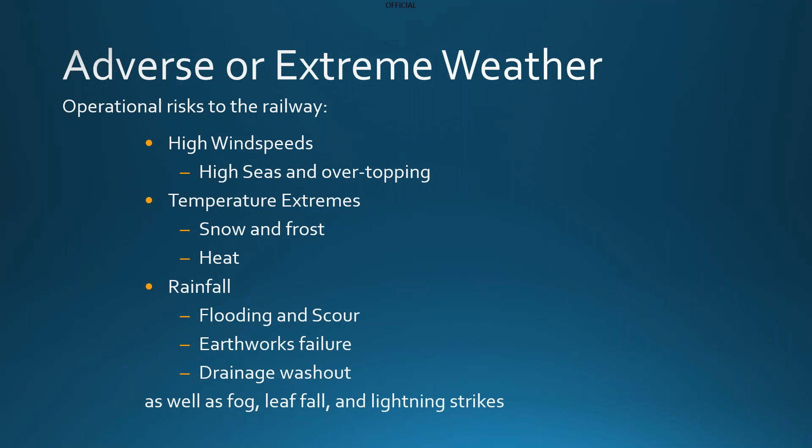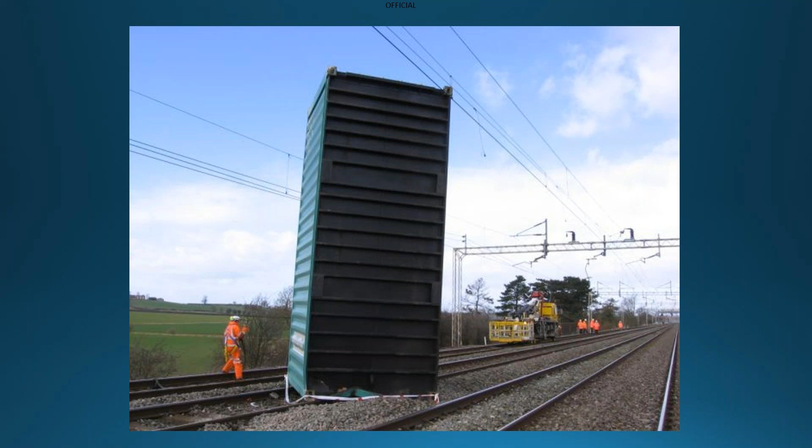This is a rather bizarre thing, which looks as though it should more likely be on the cover of a 1970s rock album or possibly a science fiction book. This is at Cheddington on the West Coast Main Line, when a couple of containers were literally blown off the top of a train as it travelled over a fairly high embankment, a most bizarre sight. Winter Wonderland, I think somewhere in Scotland.

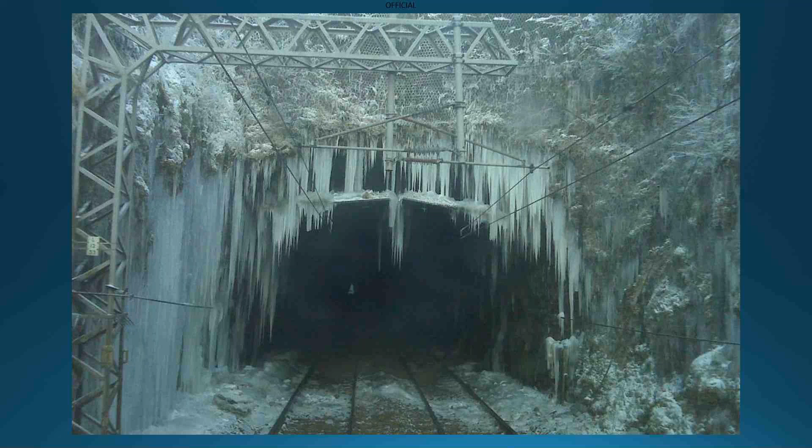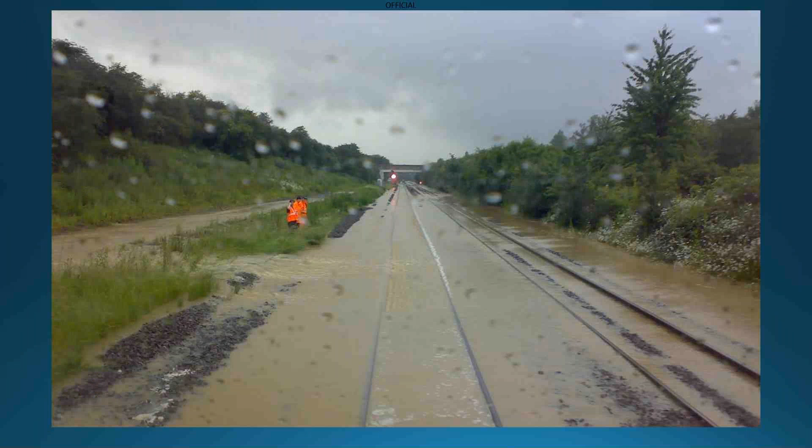Fenny Compton cutting on the DCL line was a source of frequent flooding. This is an old picture. The sharp-eyed among you will notice that the person on the left is not wearing full PPE. I hasten to add, it is an old picture, but it caused us lots of problems for a very long period of time.

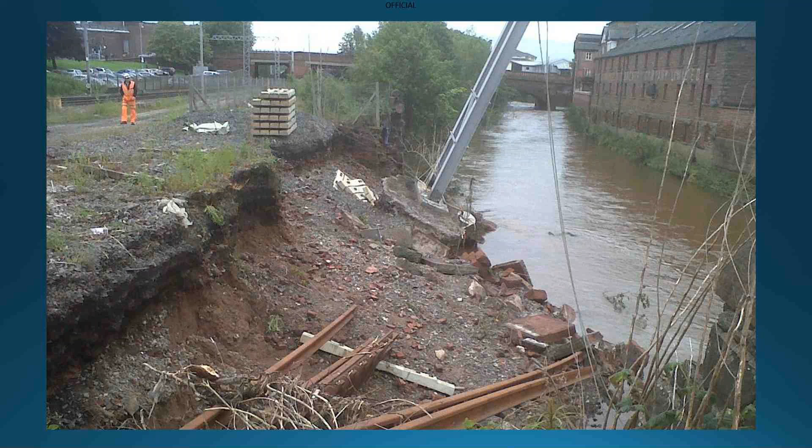This is the River Caldew in Carlisle. I believe this was at the time of Storm Desmond, December 2015, but it washed away the retaining structure along the River Caldew, which is flowing towards you in that picture, and caused no end of nuisance during Storm Desmond, including flooding the whole of the track on the approaches to the viaduct over the Eden, further to the north.

Interestingly, and as a bit of an aside, we repaired the boundary wall, which I think you can see just in the distance there. It's just a wall at the top of the retaining structure, and the EA got quite miffed with us because the gap in the wall that was there beforehand was actually a critical flow relief path for their flood model for Carlisle.

We just thought the wall had fallen down, but they'd actually built it into their model to minimise flood risk in Carlisle. And actually, when we restored the wall, it made the flooding worse in the town. So there you go. Just shows how little we know about the detail of these things.

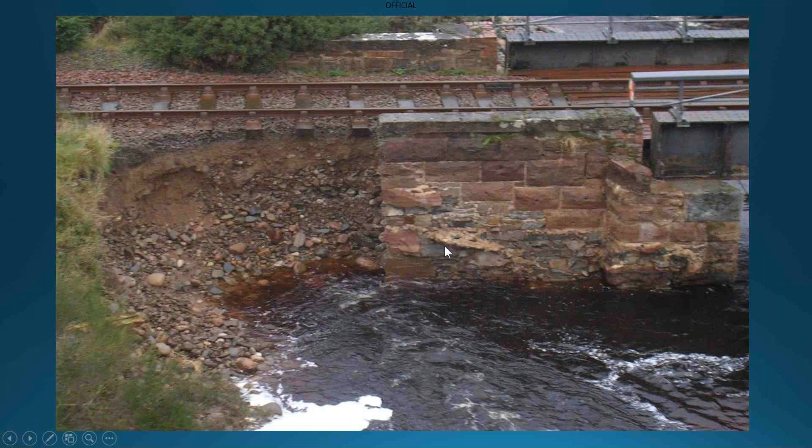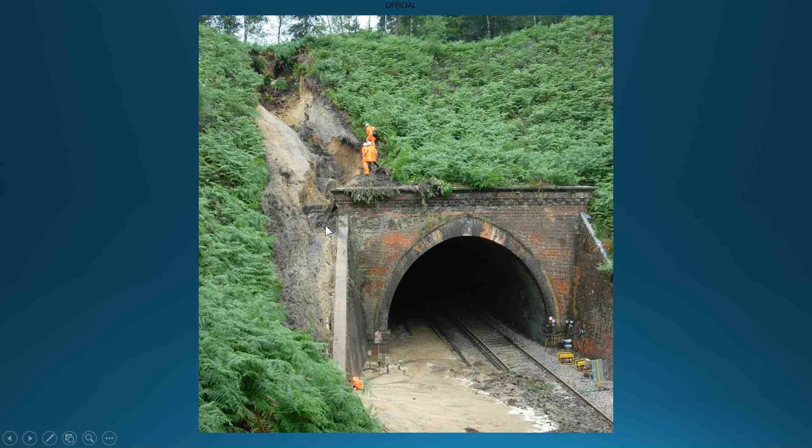This is a random structure in Scotland. There was fairly severe flooding on one of the Highland lines, and it removed part of the bridge abutment. And an unspecified tunnel portal in the southeast, showing fairly severe erosion of loose granular materials at a tunnel portal, which led to a flow of debris onto the track down below. Again, the keen-eyed will spot the third rail.

But I think it's really important to understand why water has such a bad impact on our assets. Those of you who are P-way engineers will understand the impact the water has on track formation, not just in flooding, but obviously formation issues and wet beds and so on. There is a big chunk of this talk, which I make no apology for, I'm a geotechnical engineer after all, which relates to the impacts that water have on earthwork assets.

So apologies if it's not focused on P-way, but I think from our point of view, drainage is a system and it serves all parts of the railway assets. And I think it's really important that we bear that in mind as we consider the impacts of weather.

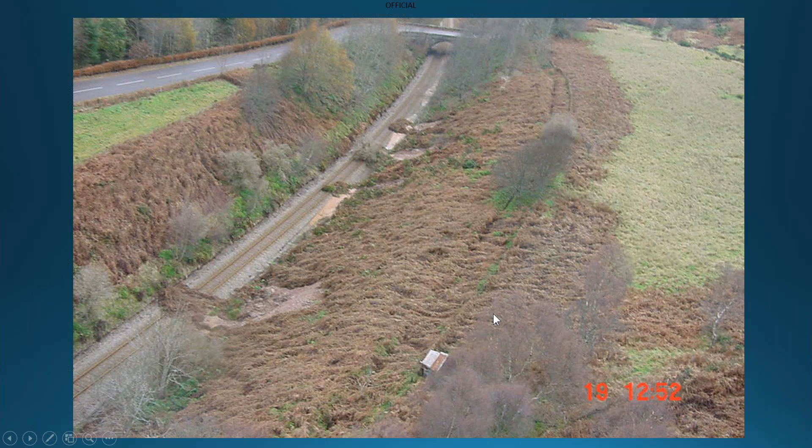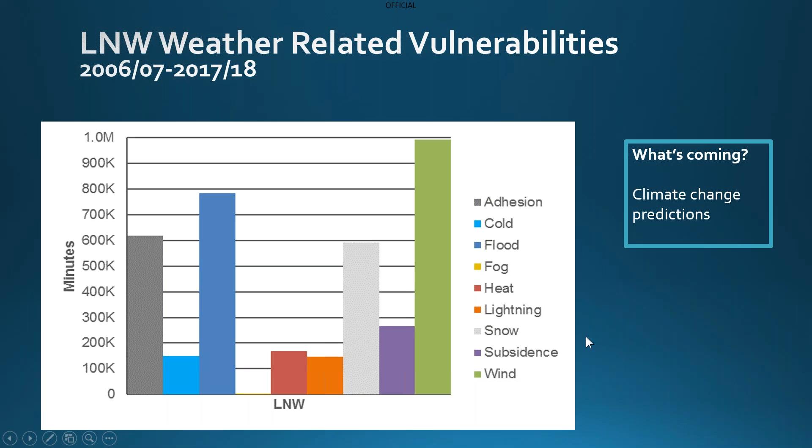So to move on, just a bit of an overview showing the impacts that water has. We have wind having the biggest single impact, but when you consider the combined effects of snow as well as flooding, and also the impacts of the lack of water due to heat and its impact on earthworks, more of that later, a substantial proportion of the weather-related delay minutes are due to the impacts of water in whatever form it arrives on the railway and on the network. So it is a very significant thing, and effective management is particularly important, obviously.

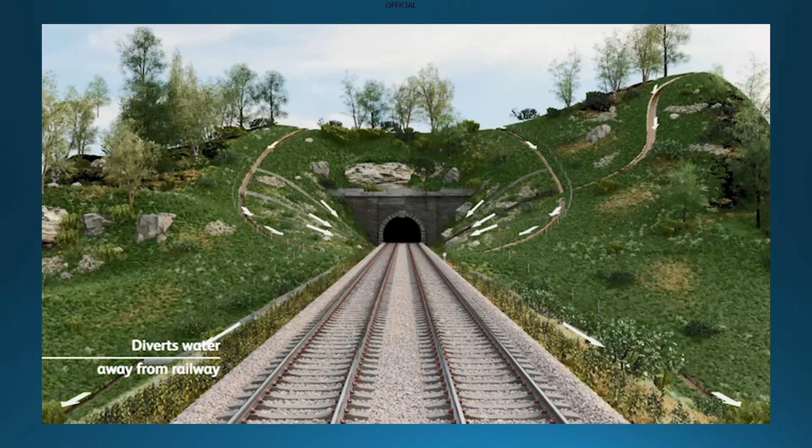So in this title I stressed the fact that this is an integrated system. And I think these two pictures that I've got here help to illustrate it. Both of these images are not images of the North Portal of Helm Tunnel on the Settle and Carlisle, although they do look a little bit like it. But they are actually taken from our Network Rail how-to guides. And these are a really good resource.

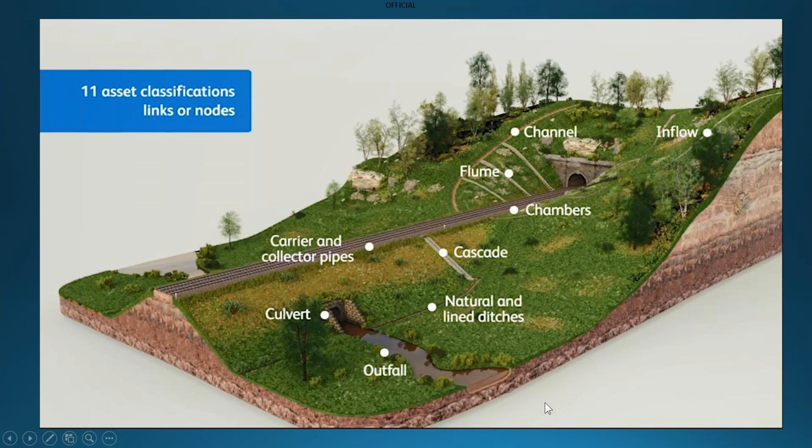And if anybody is on the call who works for Network Rail, well, in fact, you don't need to work for Network Rail because they're all available via YouTube. If you've not seen them, they are a really good primer and a really good introduction to drainage systems, drainage inspection, the Network Rail approach. They're tied into the latest version of the standards. Each video is around about 10 minutes, and it provides you with a useful guide to the sorts of assets that we're looking at.

But I just really want to stress in this picture the fact that this is a system, from the water coming in the inflows on the top right hand side, or the channel in the center right. We are managing water from third party land across our asset and to an outfall. A lot of that water is reliant on travelling through the track drainage system, but the track drainage system needs to have the capability of accepting water from off track and delivering water effectively and in a non-destructive way to an outfall at a sensible location.

And I really would like to stress the importance of the system approach. Structural engineers will be interested in the management of drainage across tunnel portals or in the formation where it crosses an underbridge. P-way engineers will be interested in the effective management of water off over bridges down onto the track, and so it goes on. So it's very hard to just consider the drainage for one part of the asset groups in isolation. And if there's one message you go away from this talk with, it's that drainage is a system, and we need to manage it as a system, and that is a really important message to get across to everybody in the business.

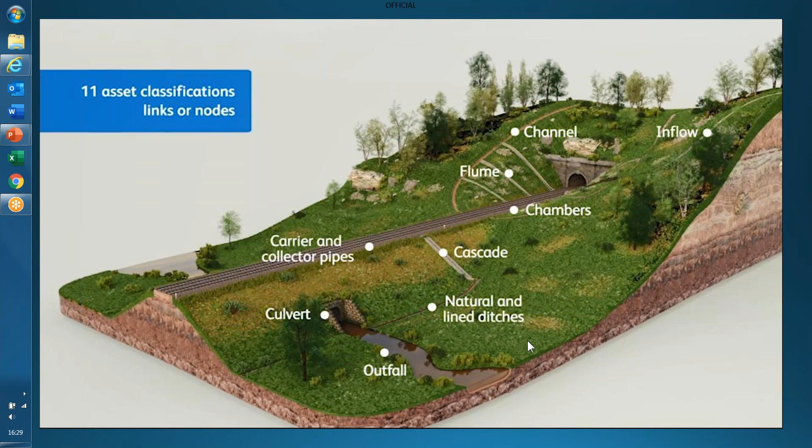Just a bit of detail on how water affects earthworks, really, and I will rattle through these slides fairly quickly because it's a sort of hydrology and soil mechanics, but hopefully of interest.

All of these water tables have an impact on the stability of the earthwork and the way that the earthwork and indeed the underlying soils behave. And it's really, really important that we manage this water, the water in the ground, as effectively as we manage the water on the surface as well.

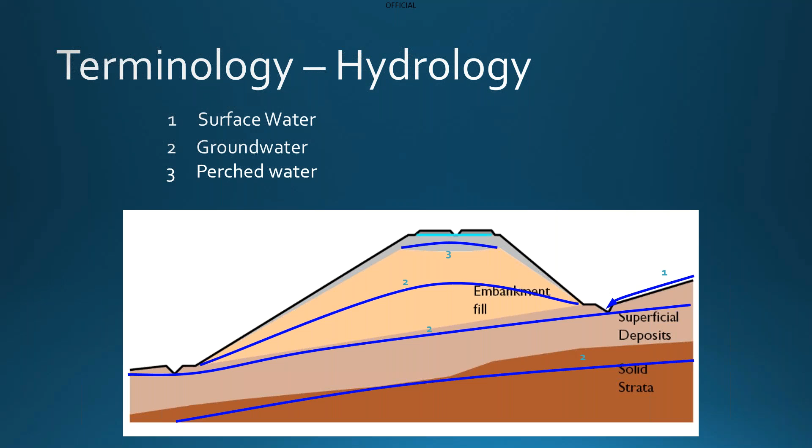A little note on effective stress, because effective stress is a crucial concept. What the concept tells us is that if you submerge a lump of rock underwater and you're holding it in your hand, it feels as though it weighs less. That's because, like anything, it is being buoyed up by the water around it. The impact of this is that if you have a soil that is completely saturated, the particles inside it are buoyed up to a degree by the water around them, and therefore the forces acting, those little arrows, point-to-point contacts, apply less friction between the grains.

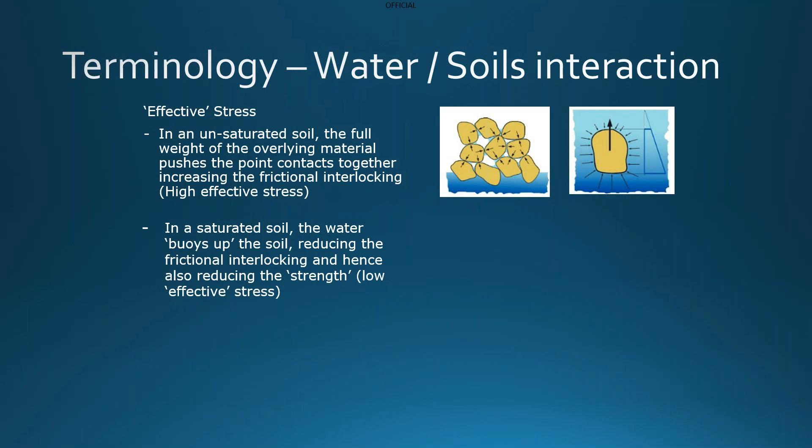So this concept of effective stress is really important because it's partly the friction, I'll come on to this in the next couple of slides, but in a granular soil, it is the frictional forces that hold the earthwork up. And if you reduce the strength of those frictional forces, you reduce the shear strength and you reduce the ability of the earthwork to stand up. So it's really important that water levels are managed if you want your earthworks to behave themselves.

Let's just continue on. Cohesion, on the other hand, is a factor also, and this is the sort of surface tension effect, which is the electrostatic attraction of the water to the soil particle. It's not very significant in large grained soil, so sands and gravels. You'll notice when you're on a beach, if you're building a sandcastle, if the soil's damp, it stands vertical. That's the cohesion holding those sand grains together. But as it dries out, and as you lose that cohesion or surface tension effect, the sand all starts to fall down.

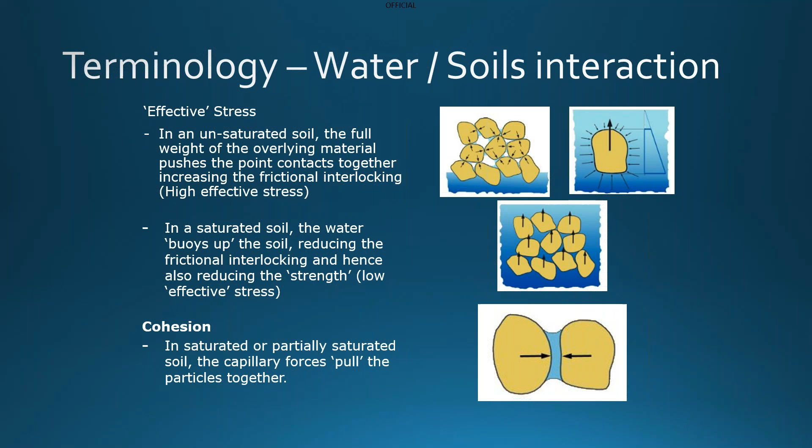So it's not very significant in sand, but if you reduce the grain sizes, looking at the bottom picture there, to clays, it starts to become hugely significant because the surface area of a clay is massively greater. If you took all of the particles in the clay, the surface area is massively greater in a clay than it is in a gravel or a sand. And so if you have those electrostatic forces, the surface tension forces acting on the grains of that massive surface area, it is sufficient to hold the clay upright.

And you'll see in some construction circumstances, boulder clay faces will stand vertical for a year and a half, 2 years of construction, simply held in place by the cohesive forces provided by the electrostatic attraction and the surface tension forces of the water in those clays. You wouldn't find a sand face standing up in the same way, because as it dried out, it would start to fall down. So water in soils affects them in a different way.

Silts are a story all of their own. I probably won't get bogged down in that, but they have some very peculiar properties which can cause problems. Perhaps some of the longer serving P-way engineers or those used to civils construction will be familiar with the term cow belly in excavations, where effectively you feel your feet wobbling on the formation you're standing on. It's a bit similar to the effect you get on beaches, where you start to get the effect of quicksand. And that can have significant impact on any excavations because it causes a lot of instability in them. But let's not dwell on that too much.

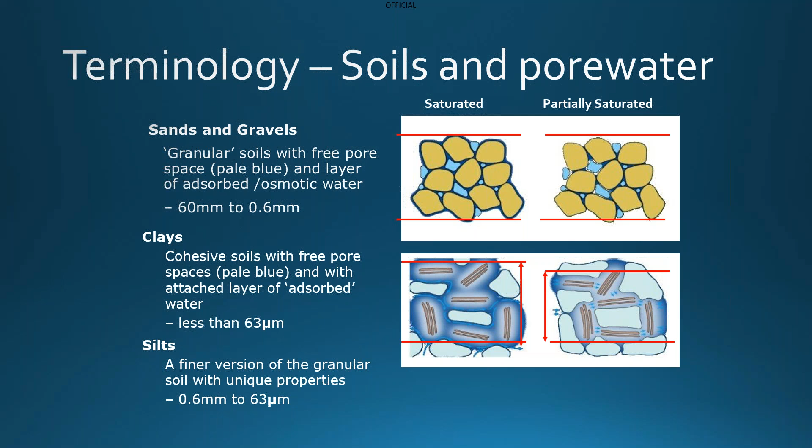So these slides will reappear throughout the course of the remainder of the presentation, but I don't want to dwell on it too much, as I say, because I am conscious that time will run away with me.

Water, therefore, is inherent in having impacts on formation failure. We understand the issues and impacts of formation where you'll have cyclic loading, you'll have movements at the interfaces between ballast and formation, you'll have disturbance and loosening, reduction in shear strength, introduction of water, and a gradual and progressive deterioration in the quality of that interface, unless the water is properly managed away from it.

It can be particularly bad if water is not managed in cohesive soils and silts, because the water cannot dissipate from the actual soil in the formation itself as easily as it can in a sand or a gravel. So sands and gravels generally are very good formation materials, but clays and silts we have to treat with a great deal of respect and make sure the water is carried away from the actual track bed construction itself, and that pathway is maintained, that gradient is maintained to the drain, either in the six foot or the cess, to ensure the water is carried away.

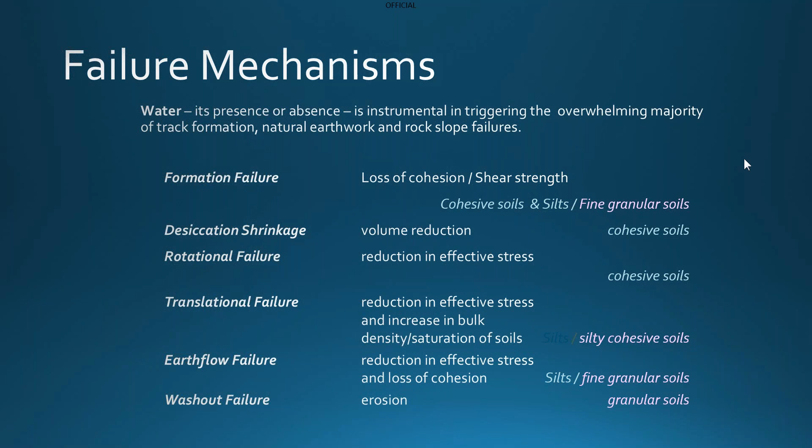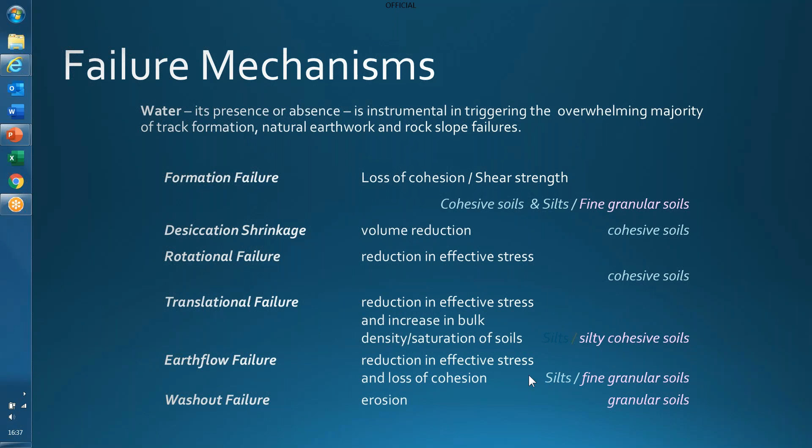Desiccation shrinkage I've mentioned leads to volume reduction. That's prevalent in clay soils. Rotational failure primarily happens in cohesive soils, due to a reduction in effective stress, and I'll show some diagrams in a moment which illustrate this. Translational failures again can be silty cohesive or granular soils. Earth flow failures, typically silts and fine granular soils which flow when they get too wet. And washout failure is just straightforward, good old-fashioned erosion due to too much water.

So just to illustrate those and what can go wrong, and I will whistle through these, a fine bit of formation treatment. Those of you who work on North West and Central route may well recognise this location, but it will be a sight to send chills through the hearts of all decent P-way engineers and geotechnical engineers for that matter. But simply cyclic loading of poorly drained formation leading to a complete remoulding and a complete reworking of the soils in the formation at this location. Not helped obviously by the fact there's a fast flowing stream on the left hand side and a permeable bank made of ballast which allows water to freely migrate across into the track.

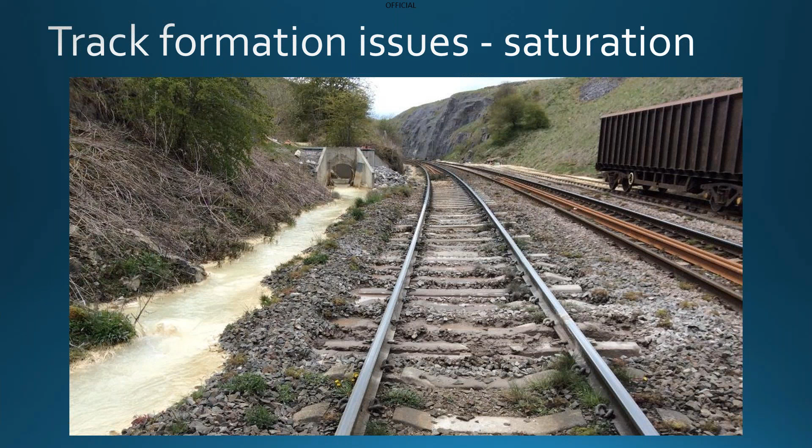Desiccation shrinkage I talked about. Here we've got a loss of top and also a loss of track alignment. The track has moved across towards the trees on the right hand side, which are ash. They have removed moisture locally, and you'll see that the loss of track alignment is very local to the position of some very tall ash trees.

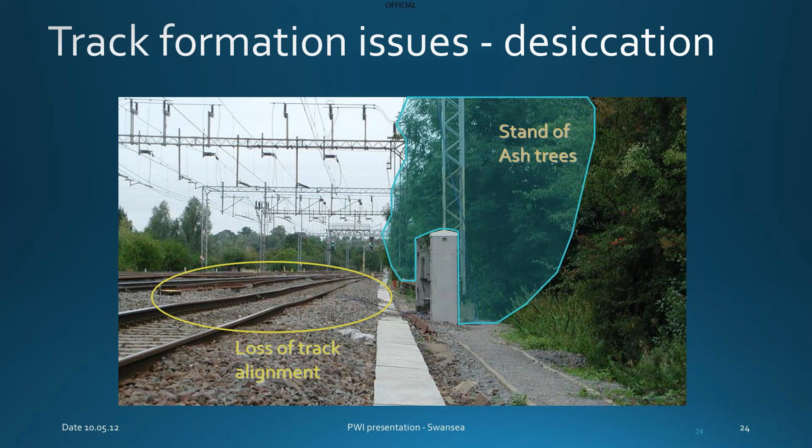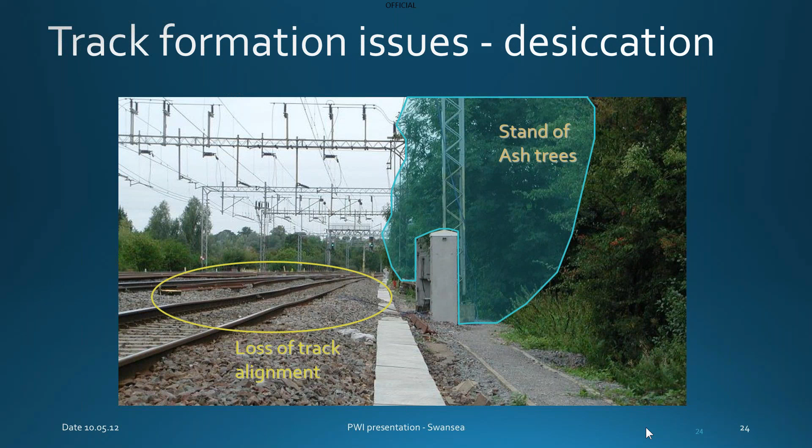Obviously, with the threat of ash dieback, it may not be a problem for much longer, but the prospect of a whole load of trees dying adjacent to the railway should fill us all with dread, because of course pretty soon we're in a position where they want to fall on the track. So let's not wish for the removal of ash trees too quickly. Again, I've talked about the desiccation.

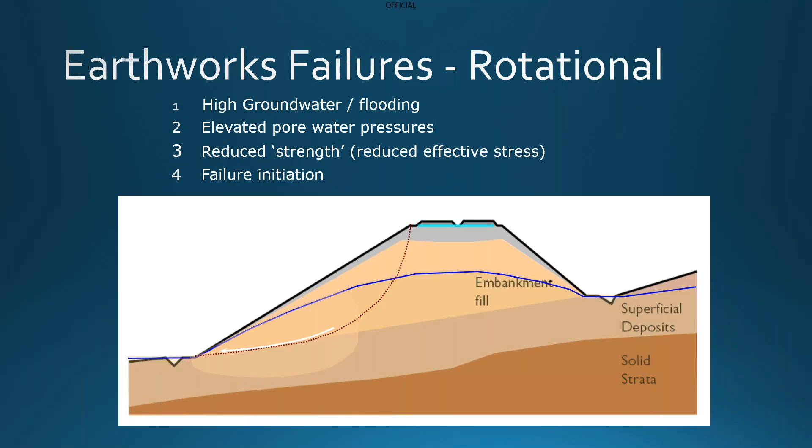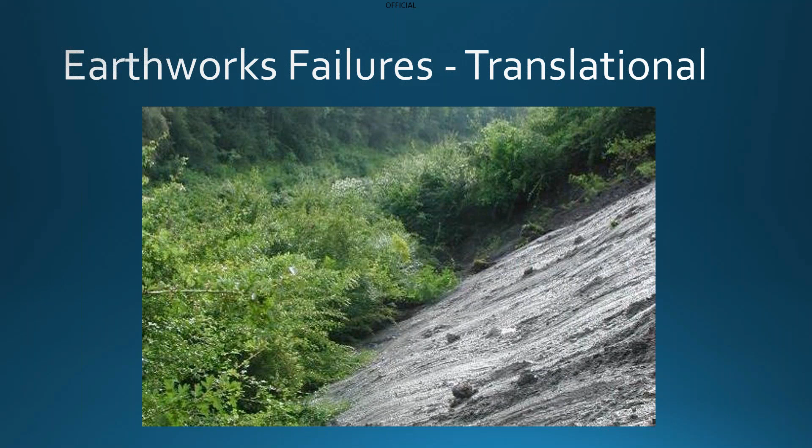This failure type is quite particular to soils where shallow weathering occurs into what we call mudrocks, so mudstones and marls. Marls very common across the Cheshire area, for example. The soil deteriorates to a depth of about a metre, metre and a half in that sort of light grey layer.

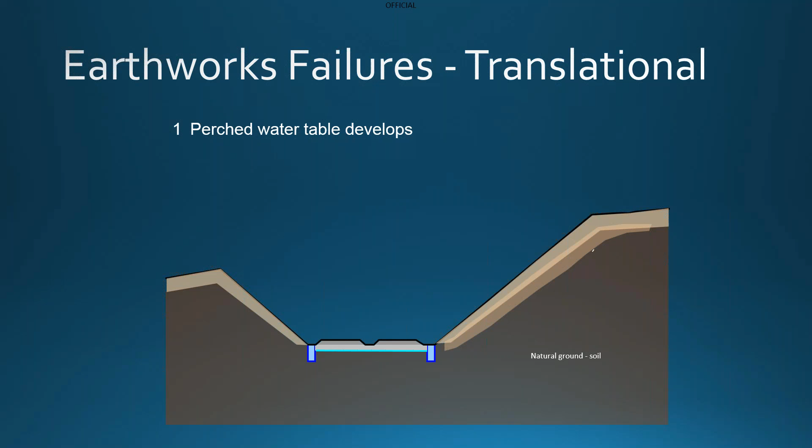And then what happens is that in torrential rainfall, water gets in through desiccation cracking and fractures in that surface layer, and it sits on the interface between the intact natural ground, the mudstone underneath, and the weathered layer on top. The pore water pressures build up. Typically they would build up down at the toe here, and that weathered layer becomes weakened. There's reduced strength on the interface, and the whole lot slides down into the cutting and onto the railway below.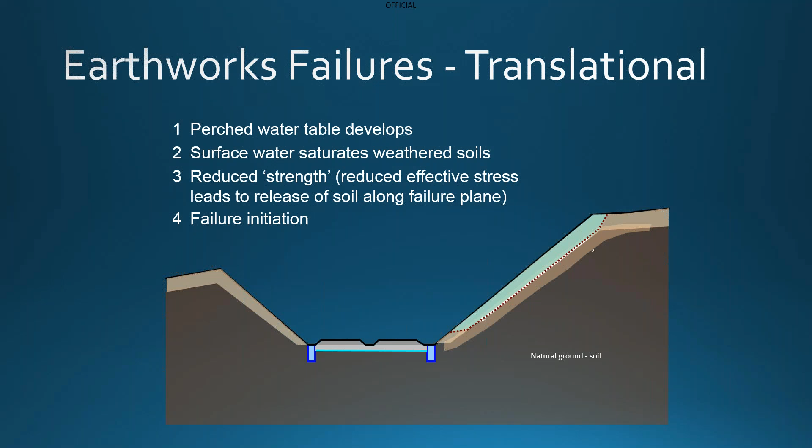So this is a failure typical of natural cutting slopes, and obviously can have a potentially serious impact on the safety of trains at the bottom. Again, principle of effective stress applies. This is an earthworks failure which occurred at Oubeck on the West Coast Main Line in 2005, and this is a classic earth flow failure.

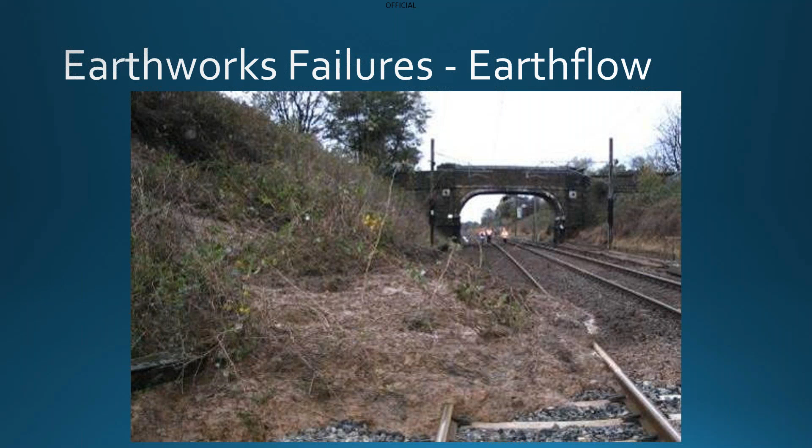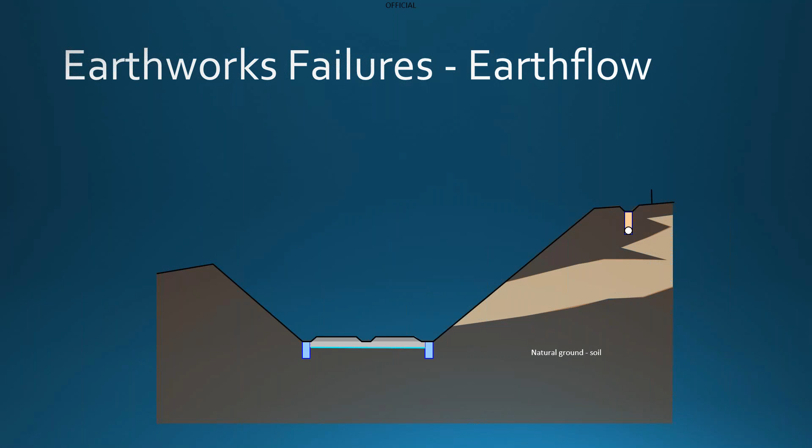In earth flow failures, there's a permeable layer; this light grey area here is a sand layer, and the dark grey layers are layers of clay. Water falling on the field above gets into the sand layer, and the water pressure builds. So the sand layer becomes saturated, the water table becomes elevated. At this toe location here, the water pressure exceeds the weight of the soil pressing down. As soon as that happens, there is nothing stopping that soil from moving. So it just becomes liquefied and it pours down onto the track. And that's exactly what happened at Oubeck.

Again, keen followers of earthworks failures, such as myself, will remember the site at Nethertown on the Cumbrian coastline. That was a very similar failure. A very serious rainfall event led to a failure of just this kind in a fluvio-glacial sand layer.

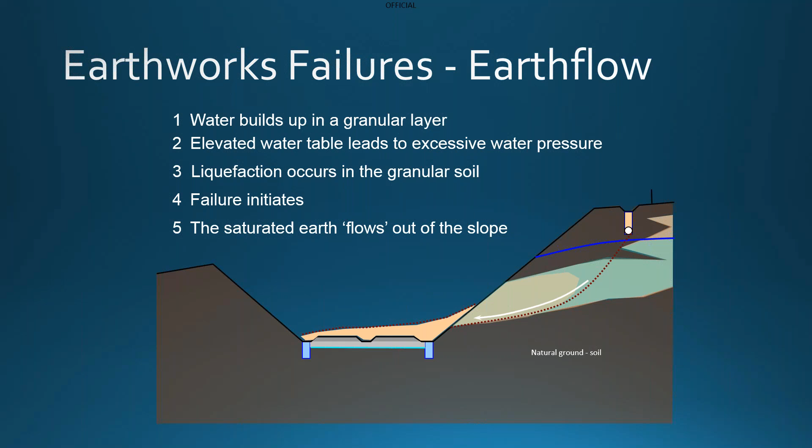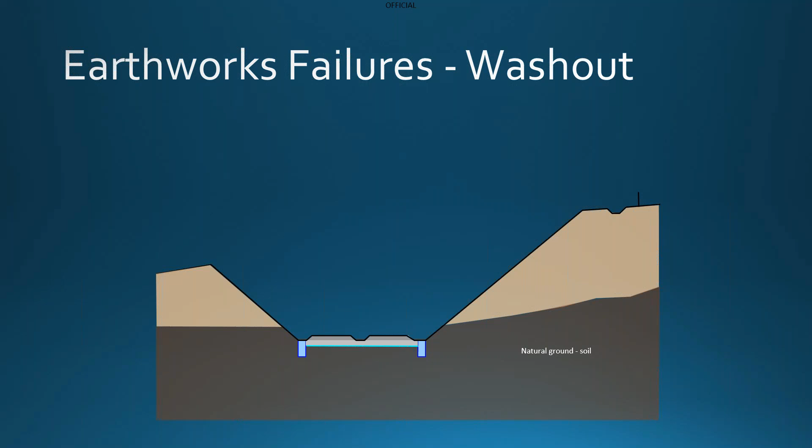Washout failures, as I mentioned, are really just too much water reaching the railway, flowing over the top, eroding soils, and so the light grey or light brown soils at the top here are erodible. Surface water flows down, it washes away, and it just literally carries it down onto the track, and the debris accumulates across the track.

Just reflecting on the behaviour of these materials, quite often you'll go to a site like this, see a big pile of debris, and you can actually walk over it because the water has escaped. The water has done its damage, and has now flowed out, drained away into the drainage, and actually what you have is a pile of sand across the track. So interesting behaviours in soils of this kind.

And in understanding the behaviour of these things, it's really important that we get a good grasp on the geology and the topography in the area. And this is what the geotechnical teams do. The earthworks examination process tries to pick up on all of these factors to assign a hazard score to the earthworks, and then align those hazard scores with the consequence of failure at a particular location. Clearly high consequence on a line like the West Coast Main Line, rather than on a minor freight route which may carry one train a day.

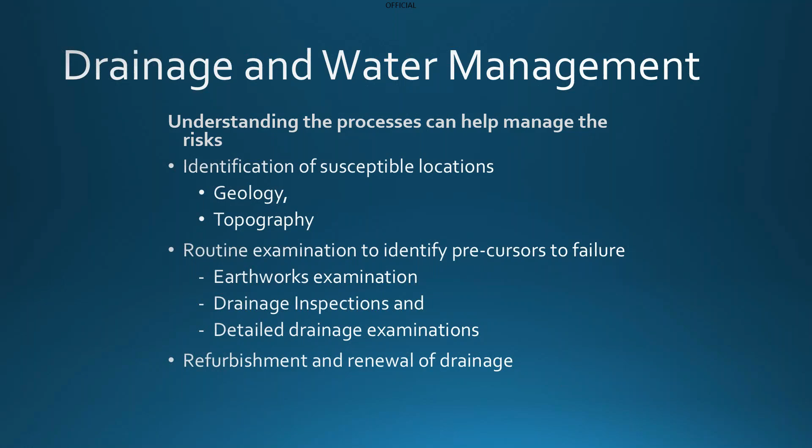And in that way, we are able to risk rank earthworks and to a degree also risk rank the associated drainage. But our drainage knowledge is nowhere near as good as our knowledge of earthworks. So that's a primer in the behaviour of earthworks and soils, and hopefully emphasises the importance of drainage in managing the risks to not only the earthworks but also to track formation.

Just want to say a few things about climate change, and I'll have to whiz through these slides because I'm conscious time is running away. Whatever our views of climate change impact, we should all be aware that there appears to be a greater increase in extremes in the weather we're experiencing. If you averaged out weather conditions over 5 years, you might find one 5-year period was pretty much the same as another. But what we are seeing is consistent with the predictions for climate change: an increase in storminess and in extremes in our weather conditions.

I helped pull together the draft Weather Resilience and Climate Change Adaptation Plan for North West and Central Region. I really just gathered the technical information from the engineering teams and put some words around it. All the clever stuff was done by the climate change team at Centre. The predictions here are UKCP09 data; we have UKCP18 data, the 2018 climate change prediction, which is broadly similar.

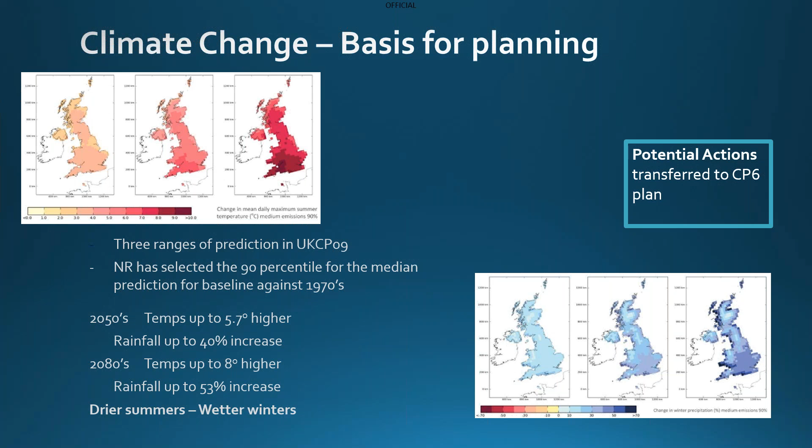For drainage and off-track, we have a lot of undercapacity drainage. Well, to be brutal, we don't actually know where any of our drainage is, and that's the first priority. But what we're aiming to do is improve resilience to extreme events during the course of the works that we do in CP6. Structures, again, greater focus on scour risk, improved coastal protection, and greater work on ice risk in tunnels for those fewer but more extreme ice events.

For track, of course, big impact on stressing temperatures, making sure that our seasonal preparedness is done correctly, and obviously with increased storminess and greater flood risk, a greater likelihood of wet beds and formation problems where our drainage is not functioning effectively.

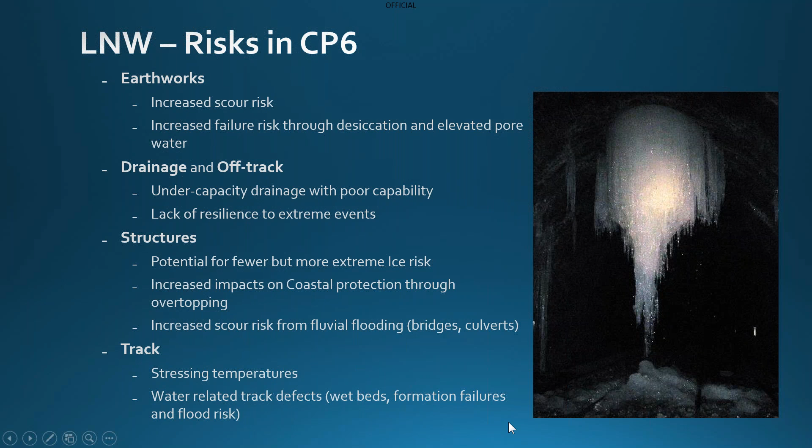So all of those things have been allowed for as part of business as usual within our plans for CP6, but we are also planning increased spend in a number of areas on earthworks, looking at soft rocks, for example, those ones which led to the failure at Harbury Cutting, subsidence and the impacts as a consequence of more water dissolving things like gypsum or causing collapse in voids underneath the ground, and addressing the backlog of track drainage and improving our approaches to vegetation management and that kind of thing.

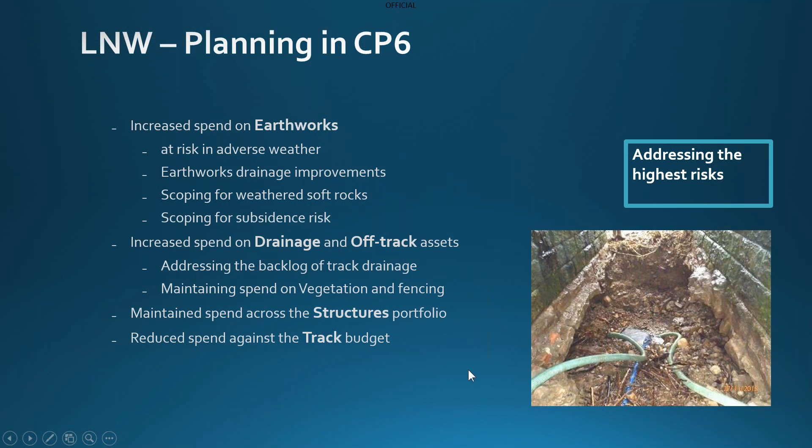On less trafficked routes, we'd be trying to manage the impacts of storms you'd expect perhaps once in every 25 years, so slightly less extreme than the 1 in 50. But we also have to make allowance for climate change impacts by considering the impacts of 1 in 200-year events, and making sure that the systems are resilient to resist extreme events of that kind, even if the track flooded, for example.

So these things are allowed for in the standards, and when we are delivering designs such as the one shown bottom right-hand corner there, we are taking into account these and trying to build the level of capability and capacity into the drainage as we're doing it. So that's our first measure in what we build.

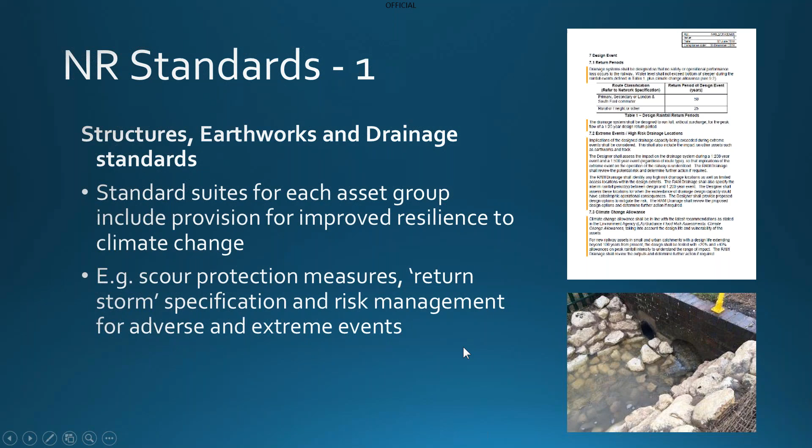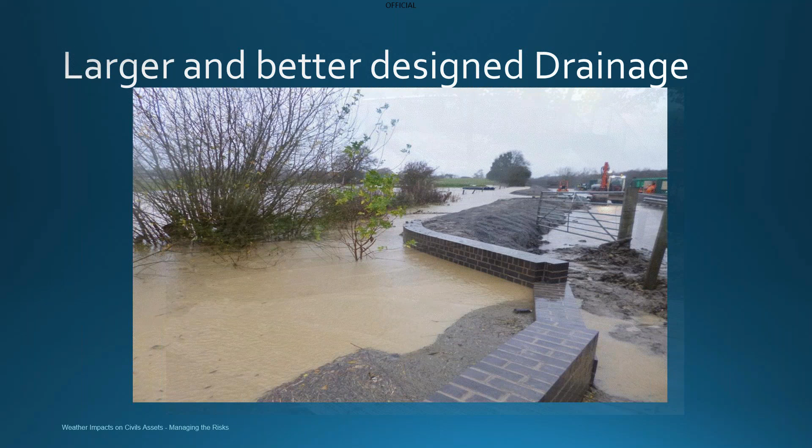And the sorts of drainage I'm showing here, if you remember that flooding picture with the person standing by the side of the railway not wearing full PPE, Fenny Compton cutting, this is the main feeder at the crest, and we've built an attenuation system there to hold the water back at times of extreme flooding to prevent the sort of flooding that we saw. You know, similar locations, we're trying to build adequate capacity into drainage systems, either formalizing drainage and making it more resilient, or putting in drainage where there was none before to try to manage the impacts.

It's not always possible to design to the standards, and that's something that needs to be directly mentioned in relation to the title of this talk, because it's all very well trying to design and manage for adverse weather, but you can't always afford to do it.

It's not always possible to build that 500mm diameter pipe in the six foot where the six foot is tight to gauge. And so we have to take a view on that, because we may find that trying to install a larger diameter pipe, one which is capable of managing a 1 in 50-year return storm in the six foot, is just not possible, and it doubles the cost of the job, and anyway the access isn't available.

So there's a heavy dose of pragmatism involved, and we need to look for alternative solutions such as building attenuation schemes off-site. That brings its own problems, because landowners don't like selling their land, or if they do want to sell them, they want to sell them for a very substantial profit.

And we have no rights of access, or very limited rights of access, to get in and insist on being able to do works. We're not like the power supply companies who have rights of access for maintenance. We don't have those. We have to negotiate every single access with adjacent landowners, and I think that's sometimes not appreciated by the general public.

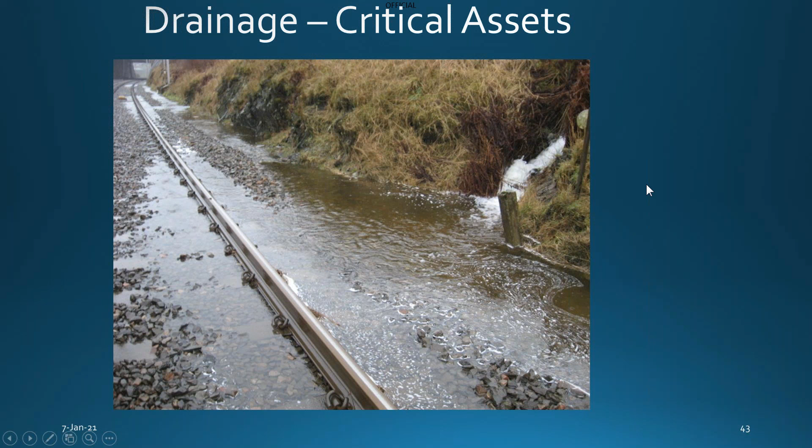Where we do have issues, and we have identified critical assets which flood on a regular basis, we're trying to introduce systems which have necessarily a level of resilience to reduce flood risk. And this is part of our business as usual, with a nod towards compliance to the standards to ensure that these locations are resilient. So that's in design, and there will be elements of that included, I'm sure, in the track design standards, which I'm not so familiar with.

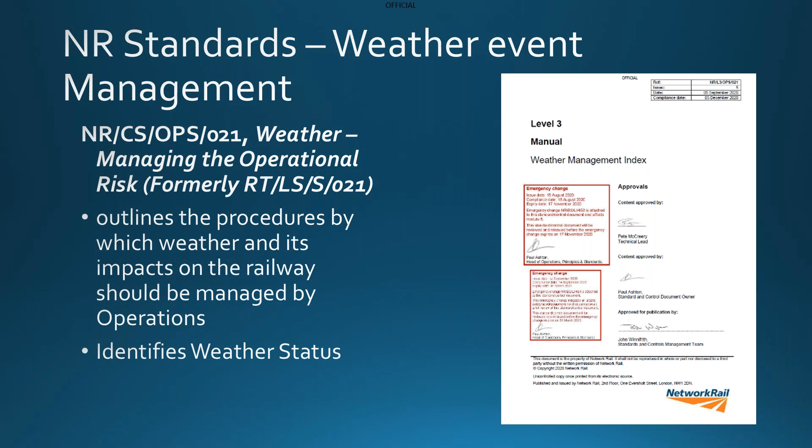When it comes to management of the risks associated with actual weather events, we have this weighty tome, standard 021, which really covers all of the things that we need to have as a region to manage weather effectively. It includes requirements for seasonal preparedness plans, and covers things like leaf fall and preparation for snow, making sure we've got the right processes and systems in place, and compliance with it is a major undertaking, which is why we have seasonal delivery specialists.

What we also have is TRK 1010, which is more targeted at how we respond to extreme weather events, and how we put people out on track and at key locations, how we manage the inspection regime at times of extreme weather, and how it ties in also with the plans for other asset groups, so the geotechnical team and the structures team.

And when I was leading the geotechnical team, we developed a plan for mitigation of risk associated with earthworks in adverse weather, and that involved us feeding into the 021 process and preparing a plan which enables us to anticipate where earthworks are at risk and where problems may occur, so that when an extreme weather action teleconference is called, we are able to provide clear guidance on those locations which we think are at risk, given the intensity of the storm.

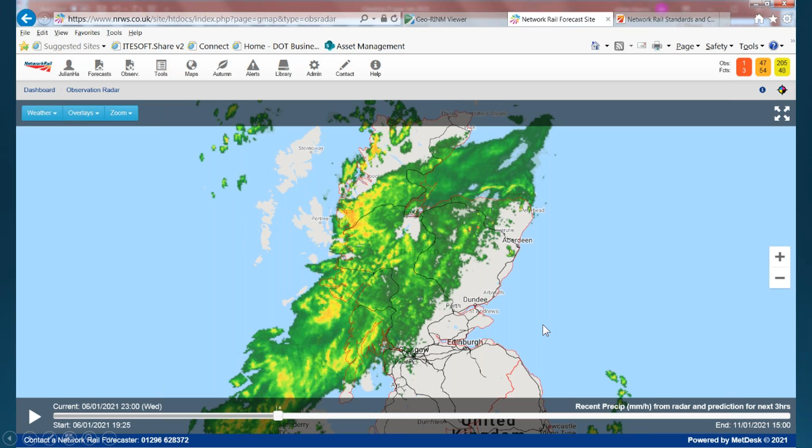And this is an extract from the observation radar. You'll see it was downloaded real time yesterday. But it does also include a prediction of what's going to happen to this band of rain, which was advancing over Scotland at the time. And that's extremely useful because it gives us the opportunity to look at predictions of rainfall based on the forecasts available at the time. And this will always be switched on as soon as an EWAT is called, so we can see what the predictions are.

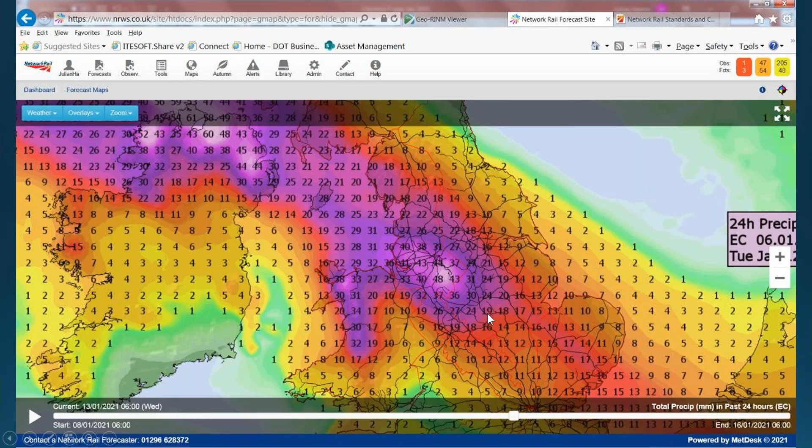This, you may want to be aware, is the weather forecast. I think it's for Tuesday next week, which shows around about 48 mil of rainfall falling on the Pennines adjacent or just south of Manchester, so Peak District Pennines border, which, let me tell you, is a substantial amount of rainfall. So I wouldn't be at all surprised if we have an EWAT called for this to manage the impacts. And what the tool allows us to do is take a forecast such as this and then look at whether we've breached critical thresholds.

And these critical thresholds for rainfall in the middle here, and just zoom into that, show us that adverse level is defined as being up to 20 to 25 mil of rainfall in a 12-hour period. Extreme rainfall is set as being 25 mil or more. Now these are levels that have been set centrally by the National Operating Centre, and they vary across the region.

You know, we say this quite frequently, but actually 15 to 19 mil of rainfall in Cumbria is just a normal balmy day in Cumbria, whereas 15 to 20 mil of rainfall down in the plush lowlands of Oxfordshire or Berkshire is a serious amount of rain.

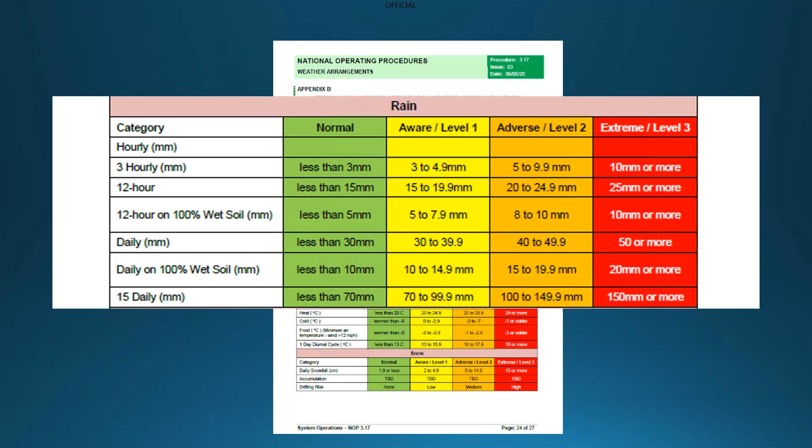So we need to manage this kind of rainfall and have techniques and processes of our own, and we need to interpret this data with a sensible and rational head and with appropriately qualified and experienced people.

Just moving on. So those are the systems and processes we have in place. That is business as usual, if you like, and we've developed those. There have been key events and critical incidents which have developed and built our capability in those areas. And I just want to talk about those for a moment because, of course, at the back of everybody's mind will be the incident at Stonehaven and Carmont in the summer, a really tragic event which I'm sure will have had the same effect on all of you on this conference call that it had on me, which is a sick feeling in the pit of my stomach.

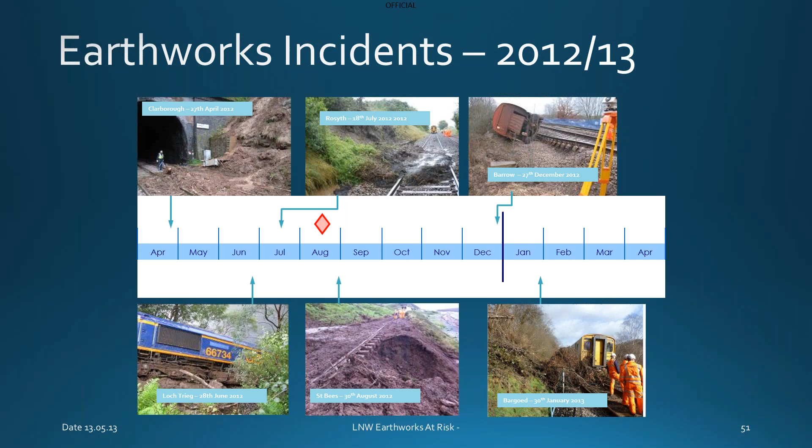We had a whole range of incidents in 2012-13, which were very prominent derailments. This led to a lot of scrutiny from the regulator and the establishment of a 10-point plan to start to address the issue of the impacts of adverse weather and excess water on the earthwork assets, because there were a very large number of derailments in a short space of time. We got an improvement notice because we were not felt to be moving quickly enough after that period of 12-13, and the 10-point plan was not being put in place quickly enough.

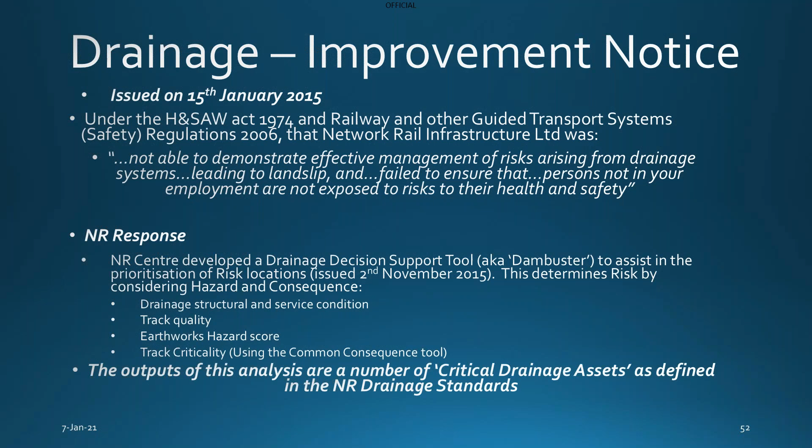So we were told that we were not able to demonstrate effective management of risks arising from drainage systems leading to landslip, and we were failing to ensure that persons not in our employment were not exposed to risk for health and safety. This led to the production of a list of critical drainage assets, and we have been managing those assets since then, with a series of mitigations in place, which are an enhanced quarterly inspection regime at those sites identified as being critical, so that we can determine whether or not they are deteriorating and what the condition of the drainage is at those sites.

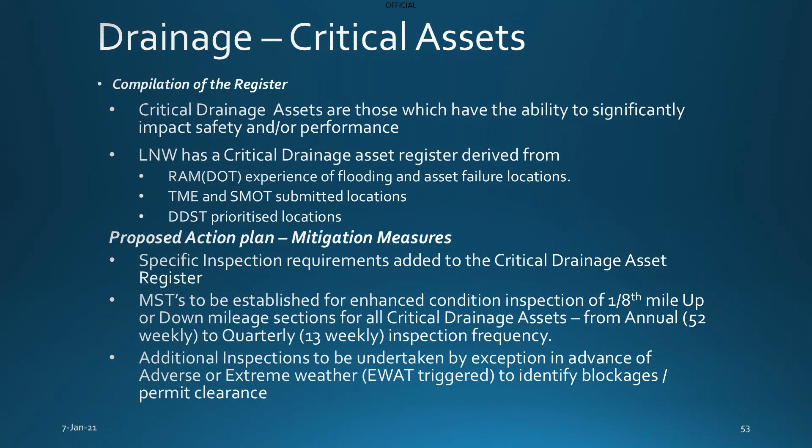But it was very much a sticking plaster, if I'm honest, and the actions put in place and undertaken by the maintenance organisation really are a holding measure whilst we try to get our act together in terms of asset knowledge and delivery of improvement to drainage assets at those locations and improvement to the earthwork quality.

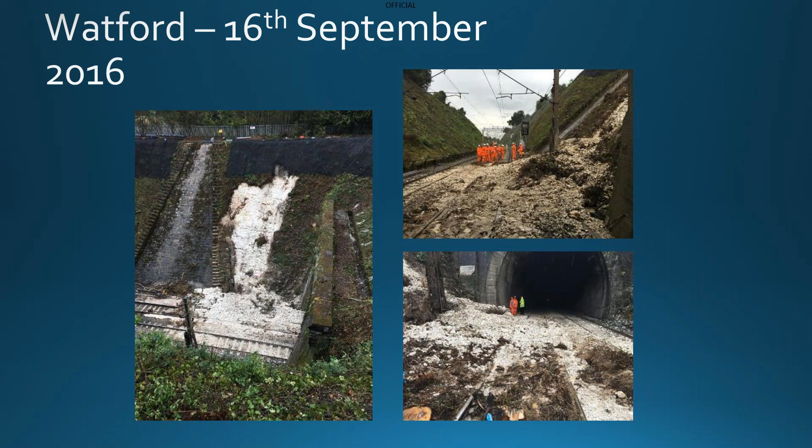That's all very well, but then Watford happened. Watford brought renewed vigour and renewed scrutiny from the regulator to our management of surface water runoff. This is a washout stroke earth flow stroke translational failure. Chalk does not behave like soils that I described earlier. It's a soft rock, but the volume of water flowing off the adjacent Warner Brothers film lot was of a size and volume that it just washed the material down. In our defence, we were repairing the slope at the time, but unfortunately it did derail a train, and we were really, really fortunate not to have a serious incident.

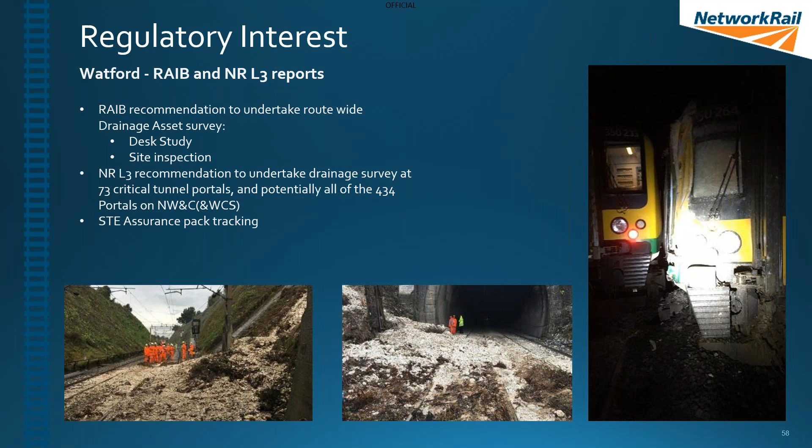So this brought even more scrutiny from the regulator. Their recommendations were that we needed to get to grips with our drainage data capture programme, as well as the critical drainage asset locations. They introduced a requirement to inspect critical tunnel portal sites, and then ultimately they wanted us to continue to do a thorough inspection of the drainage at all tunnel portals. That's 434 tunnel portals on North West and Central Route alone. So a major undertaking, lots of pressure being applied. Out of the Watford event, we said, well, we need to get better at predicting these sudden storm events that lead to that volume of rainfall falling.

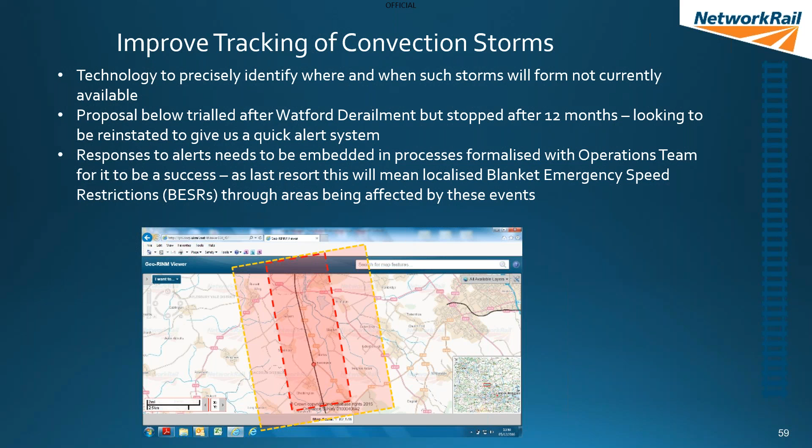So we proposed a system to MetDesk, well, I think it was MetDesk at the time, whereby they would be able to track the advance of significant storm events towards the railway and give us an alert. And we also started to introduce blanket speed restrictions when we had a forecast of rain exceeding particular thresholds, and more on that in due course.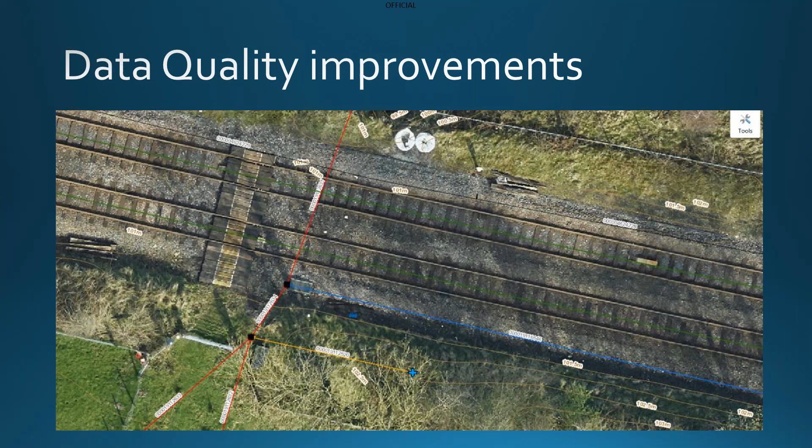We know what size it is, we know what pipes flow into it, we know what direction the water flows out of it. So we're building really good quality data, but it is a slow process, and that's in response to direct pressure from the regulator, even though it's something we knew we had to do. So we are taking steps in that direction, and more information about the drainage data capture programme there.

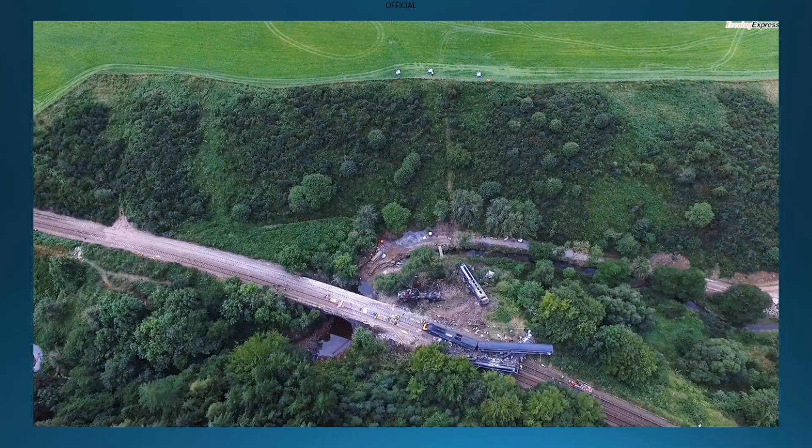But then Stonehaven. And this has really been another one of those, if we thought we had pressure before from Watford, we have seen a further seismic shift in the amount of pressure being applied now to our management of drainage and earthworks as a consequence of this. North West and Central have produced a 9-point plan.

This involves immediate inspection of sites similar to those at Stonehaven, a review of the extreme weather plans, looking at technology and solutions for tracking those storm events. You remember that diagram I just showed you with the rectangles of different colors in? Let's get that in place. We need to do it. We need it because this was a convective storm event that happened suddenly, caused a massive impact on the railway. We need that kind of technology to track now.

We need to improve our alerting system, so we need to be looking at monitoring systems with a renewed vigor. That's something that's been bubbling along in the background for quite a while, and we've really not got to the point where we've got effective, cost-effective monitoring of earthworks assets. We've also got £15 million worth of funding to plough into critical and high-risk drainage and earthwork locations. We're looking at doing some research studies as well, and building a program of works there to deliver at those sort of high risk, high impact locations.

Accelerating the delivery of the drainage surveys. The aim was to complete by year 4 of CP6. We're now looking to push for that completion by year 3. And then what can we do better to manage our response to incidents of the kind that caused the failure at Stonehaven? We have had a couple of incidents recently, one at Whitmore on the West Coast Main Line in particular, where a train ran through debris on the track. That was a similar convective, sudden summer storm event, and we again got away with it on that occasion, and that's just not good enough.

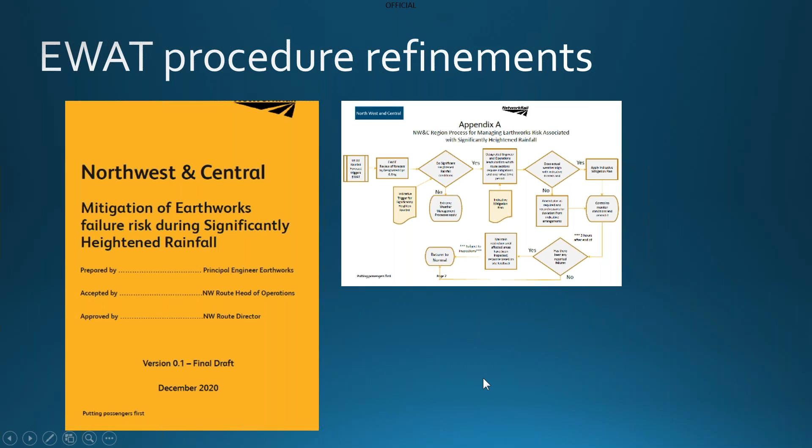We've developed our own process to try and manage the impacts better, to better predict the impacts of rainfall, to provide some certainty rather than relying on somebody knowledgeable in an EWAT, or extreme weather action teleconference call, saying, I think you should impose a speed restriction. We need to get a little bit more rigor around it. So what we've done is we've set our own thresholds. If you remember, I talked about thresholds set nationally by the National Operating Centre. We've set our own thresholds now on North West and Central.

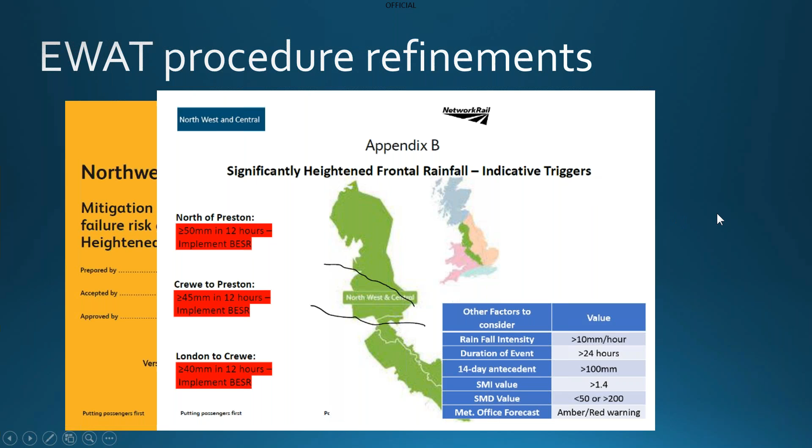And if we exceed these thresholds, we are immediately considering the implementation of blanket emergency speed restrictions. And that's always a hotly contested topic because of course, as soon as you impose a blanket speed restriction, you cripple performance and you reduce the amount of trains that can run. Just conscious of the time, I do need to push through this fairly quickly, so apologies if I'm rushing these last few slides. I talked about this system here.

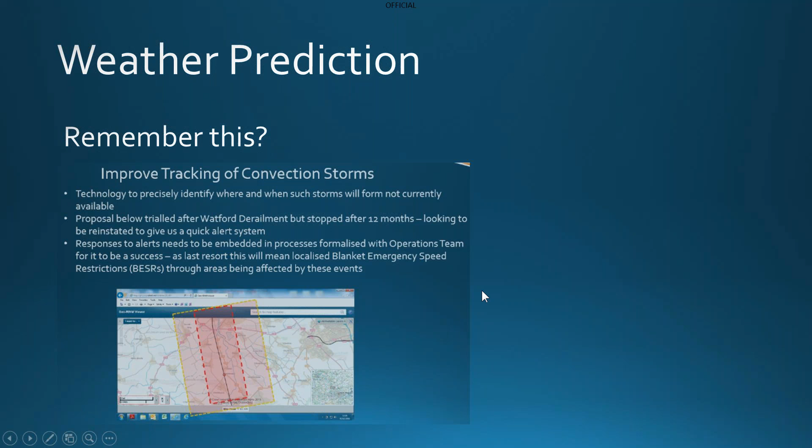There is a thing called Nowcasting, which, based on the overlay of multiple forecast tools, enables the meteorological office and other weather systems and setups to track storms and predict where they will fall. We would love to implement this because if you imagine a length of railway running through the red and pink zone there,

Nowcasting would enable us to real-time predict at what point the storm was going to hit the railway and give a level of probability as to which bit of the railway it hit first. That would help us with our immediate responses to these kind of storm events. So that's something that we need to be looking at actively, and we are in active discussion with the Met Office as a direct consequence of the Stonehaven events to look and see if we can introduce that.

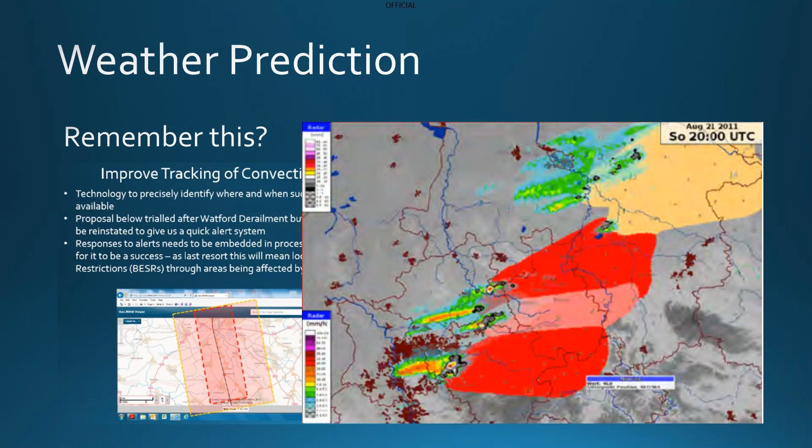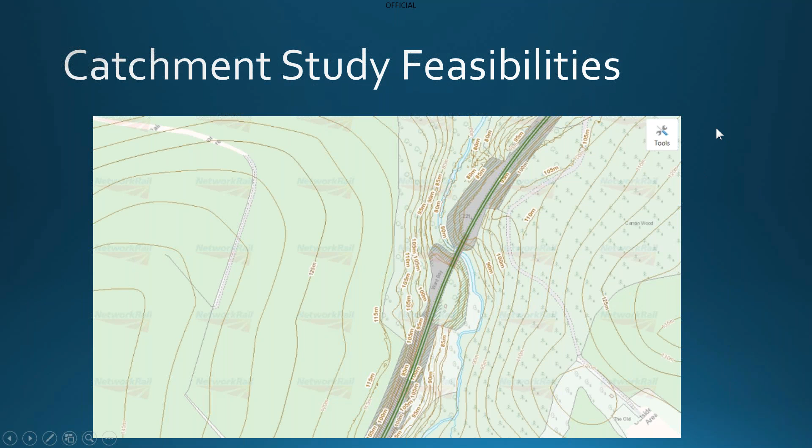One of the things that Carmont derailment location brings to our attention is this area of hillside sloping down to a concentration feature at this site here. We need to be looking at the catchments adjacent to the railway, not just at Carmont, Stonehaven, but at all the other locations on the network. So we need to be modelling catchment areas adjacent to the railway to identify those locations where the topography is such that water will be concentrated if you have extreme weather, and enable us to risk rank locations on the basis of the catchment adjacent and give ourselves a chance of prioritizing those sites for treatment.

You know, at this location, which is Carmont, where the failure occurred, the water concentrated at one point. We should have had effective drainage at that location, but we didn't. And that is common to a lot of locations on the railway. So we need to be able to have the right sorts of tools which enable us to focus and target on these sites. So that is another big area where we need to invest over the next 2 to 3 years in feasibility and also into CP7.

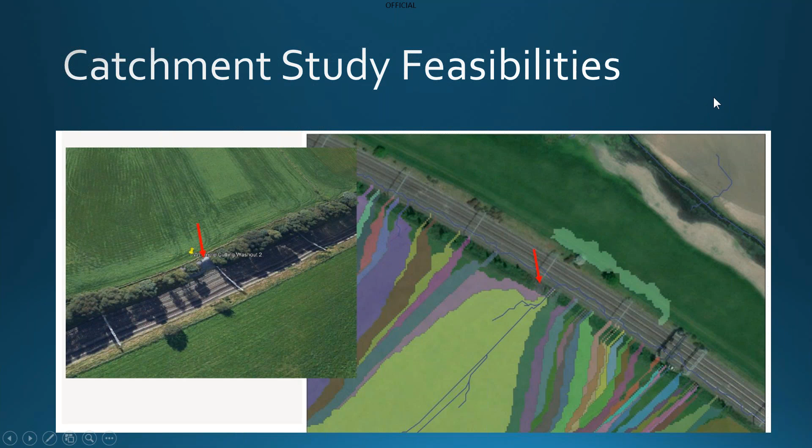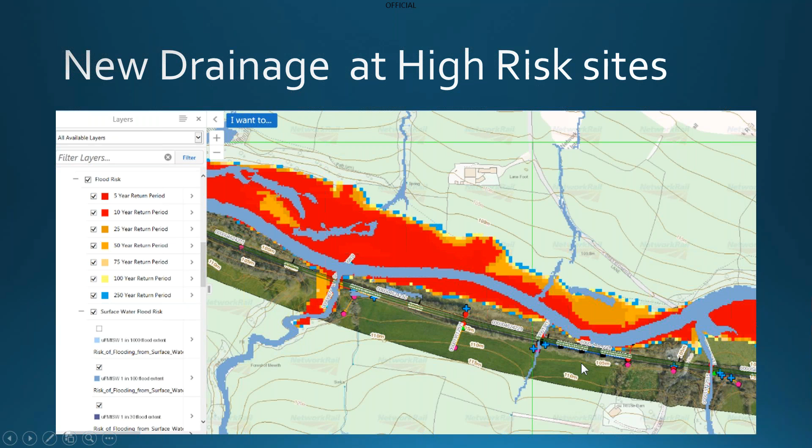Using techniques such as surface water flow mapping, we can pick up on concentration features. This is the 1 in 100-year flood event, shows water concentrated at these sites. That gives us a lot of clues as to how to improve the drainage assets that we have there to build greater resilience. So it's another means of identifying locations where we get concentration.

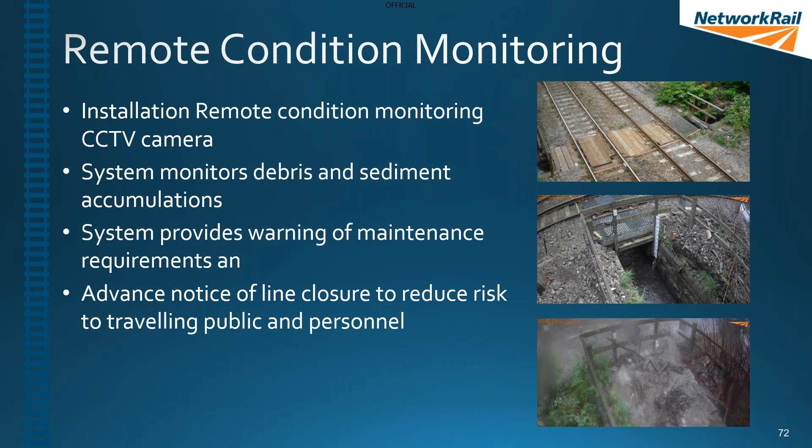And also there's a lot we can do in remote condition monitoring with the installation of cameras at critical locations. Now the P-Way team don't need to go out to site to see whether it's functioning effectively, because they can see the middle picture and assess that there is no problem. But as soon as they see the picture on the bottom there, they know they've got to hop in their vans, get out there and start clearing debris. So remote condition monitoring enables us to dispatch people to the right location in an efficient way.

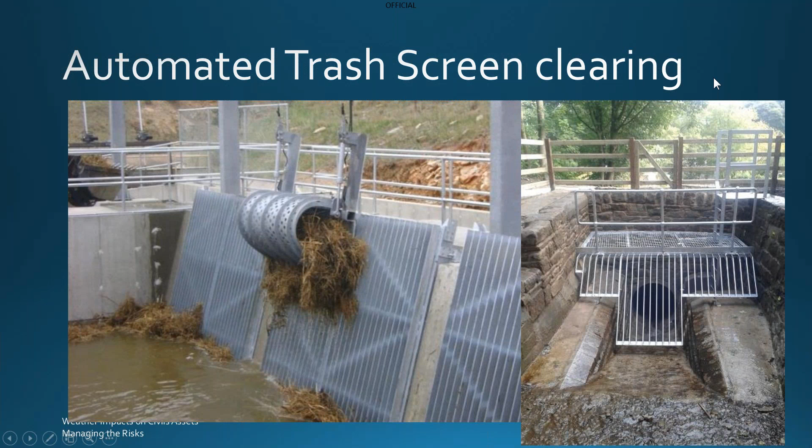And finally, some technologies such as automated trash screens, necessary at locations where there's a high debris load. This would just remove the risk of flooding at critical locations, and this is technology we need to be looking at as well. We are installing weather stations. We've got 60 going in across the network. They're good for analysing events after the event. They're not so good necessarily for predicting, but they do provide us with additional data.

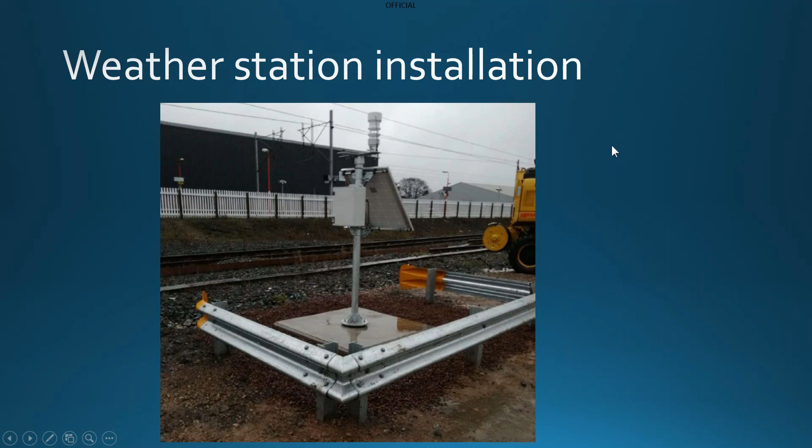And just to finish up, really, we need to be just better at surveying, maintaining, monitoring, improving our drainage asset knowledge, building a greater whole system understanding so we can target in the most cost-effective way. We need to be understanding what brings the greatest benefit for performance and safety risk, as well as financial risk and others. And we need to be tying it in with our management of vegetation to prevent desiccation impacts and so on. We also need to be doing all of this with an eye on climate change to build the resilience of the railway. And now we've got COVID to think about. And what impact is that going to have?

I think that's probably the topic of another talk, to be honest, and I'm conscious I've probably run over by at least 10 minutes, so it's probably better if I leave it there. But hopefully that's given you an indication of the sorts of impacts the weather has, and the sort of systems and processes we have in place, and the things we're trying to do to build capability and build resilience against its impacts as we move forward. And that'll certainly be a substantial part of my planning for CP7, to make sure that we get the right levels of funding available, all dependent on what happens with COVID, as I've mentioned.